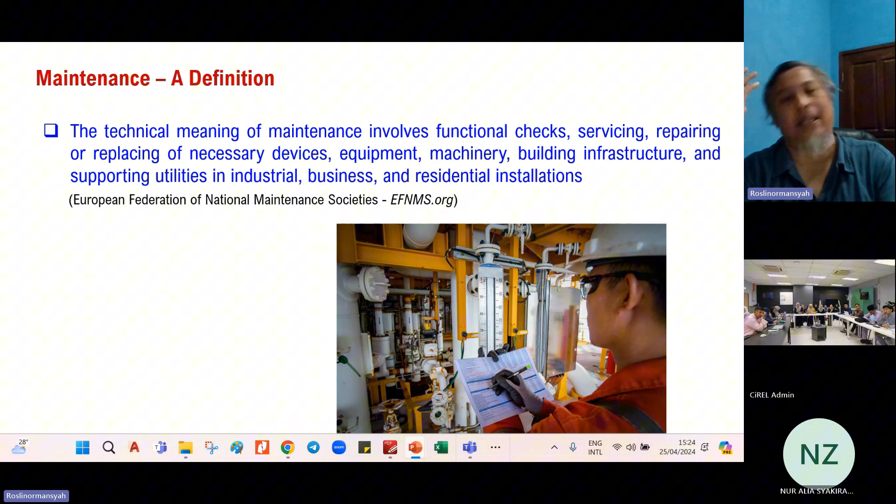And then the function - maintenance is also defined sometimes as repair or overhaul. So in maintenance, repair and overhaul, there are four kinds of objectives. One is about activity, which is very huge, very numerous. When you see the maintenance aspect, there is no limitation on time. Sometimes the time is limited, resources are limited, but the target is unlimited.

You have equipment, but the equipment is limited. You have time, but the time is limited. You have resources, but the resources are limited. And you have a target, but the target is unlimited. Sometimes we are dealing with this situation.

The boss wants the equipment ready - maybe 80%, maybe 90%, or maybe 100%. But on the other hand, there are limited resources for that. So how can the team do this safely? This is a big question. The boss wants the equipment to start immediately.

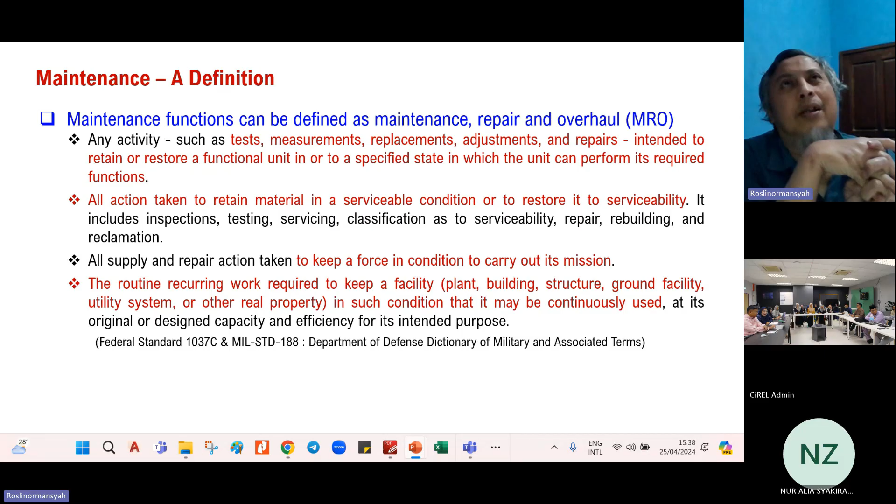Another thing is routine recurring work. This can create a stubborn person, because they feel, yes, I've been doing this for a very long time, more than 10 years, 15 years, 20 years, conducting routine recurring work like this. So for me, it is not new again.

If the person conducting maintenance thinks like that, then you have a hazardous situation, because 20 years ago is different from right now. Why? Because the risk is so dynamic. Risk is not static, risk is dynamic. It can occur from the equipment, from external factors like weather, natural situations, or it can be created by humans themselves.

When someone thinks, I'm a very experienced person for this, that means this person is in a dangerous situation, because they will disobey any small kind of risk, any small kind of deviation. As you know, a big accident or catastrophic accident mostly comes from small deviations. So be careful, be careful.

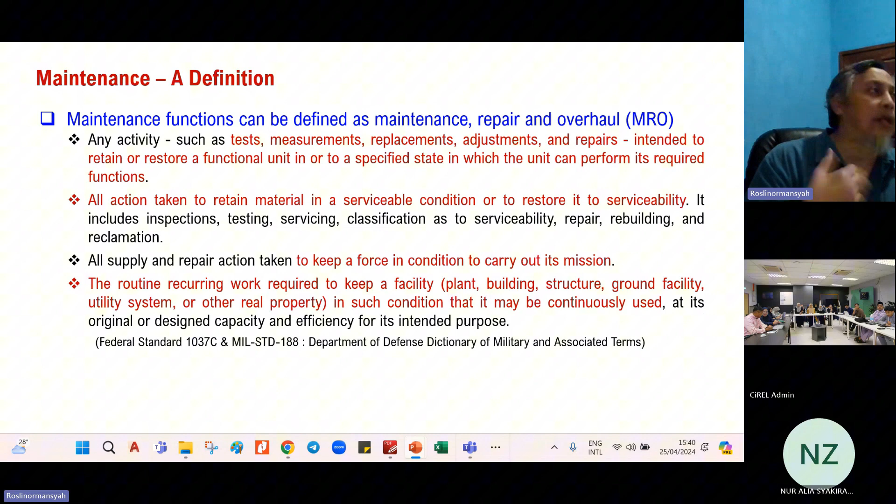Be careful with the person who feels that he or she is very experienced with this machine, with this equipment, because my experience has taught me a lesson that this kind of person will someday create a major accident.

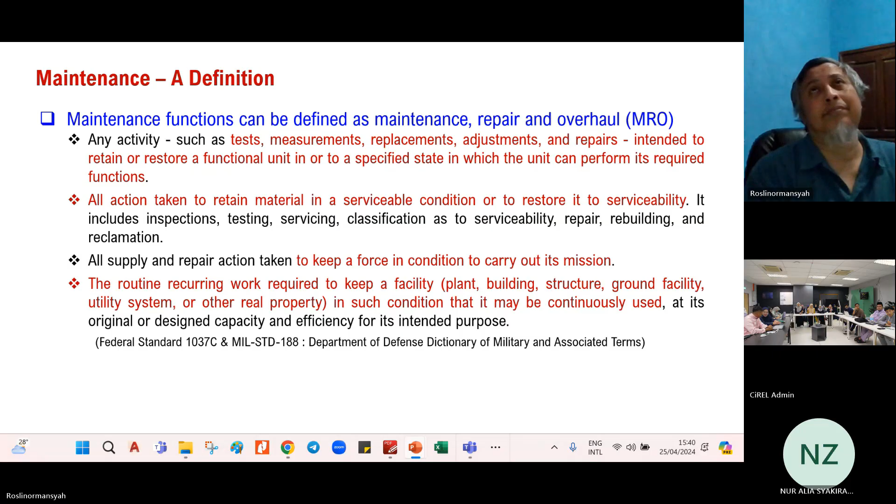As you know, maintenance is a very dynamic activity. It can be predictive, preventive, or reactive. Predictive and preventive are more stable compared with reactive, because in the predictive or preventive state we have good preparation. We learn from experience, we learn from history, and we prepare for maintenance, so safety can be more manageable. But in reactive maintenance, safety is not well managed.

Sometimes the problem is that most companies, most industries, choose reactive maintenance compared with preventive or predictive maintenance. So if you go to an industry that applies predictive or preventive maintenance, that means this industry is more concerned about safety, rather than an industry that is more comfortable with reactive maintenance.

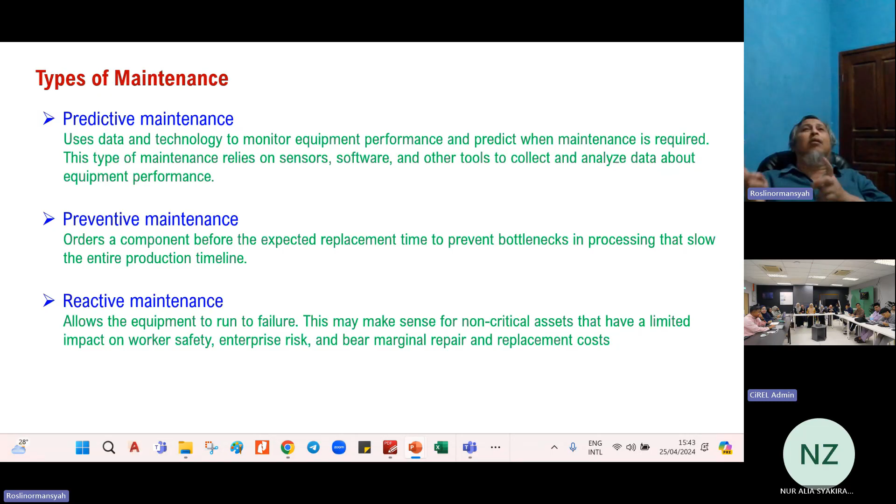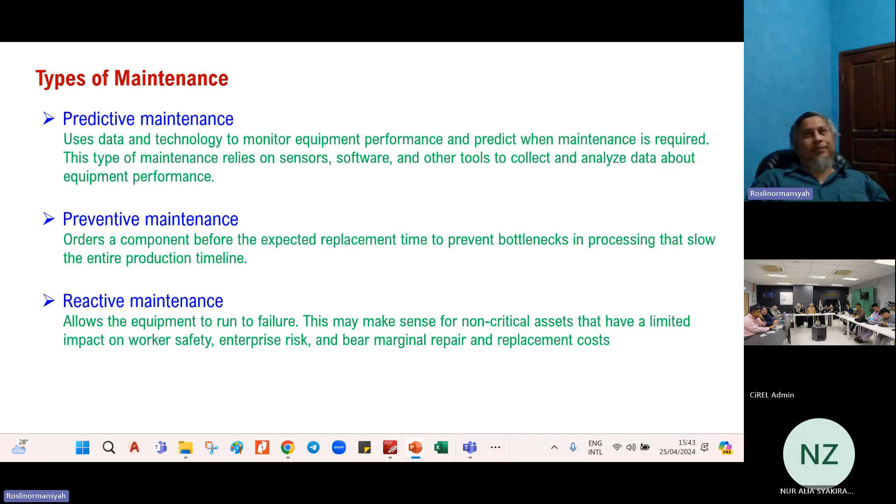From the schedule, from the plan, we know how they are conducting, how they are preparing, organizing, or monitoring. More planning, more execution, more monitoring means the risk is part of their concern. If there is no monitoring, no planning at all for the maintenance, that means there is no full concentration on making risk part of the heart of maintenance. It's very easy.

So the biggest challenge of maintenance safety comes from the habit, comes from the mindset, comes from the attitude, particularly if there is no participation of employees inside the maintenance activity.

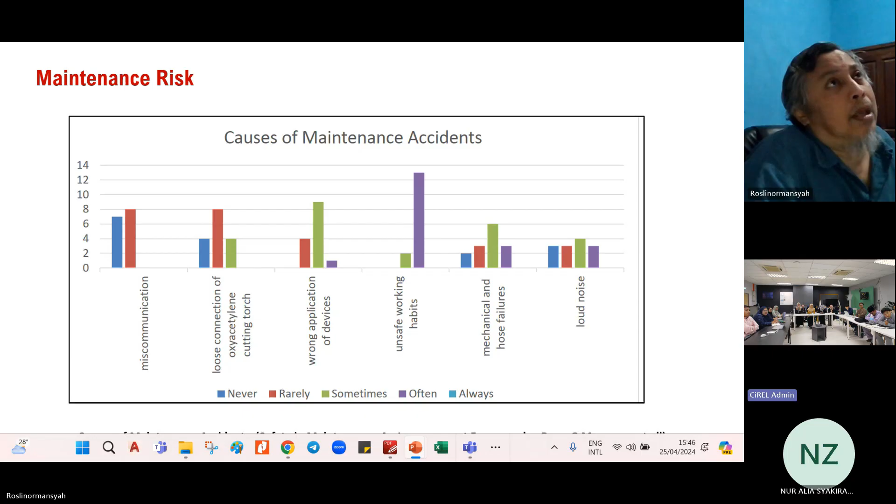Because they are requesting from the company, but the company is late to supply their specific tools. And the maintenance guy is chasing the schedule, chasing the timeline, so they have to conduct the maintenance activity right on time. But the problem is the equipment is not available.

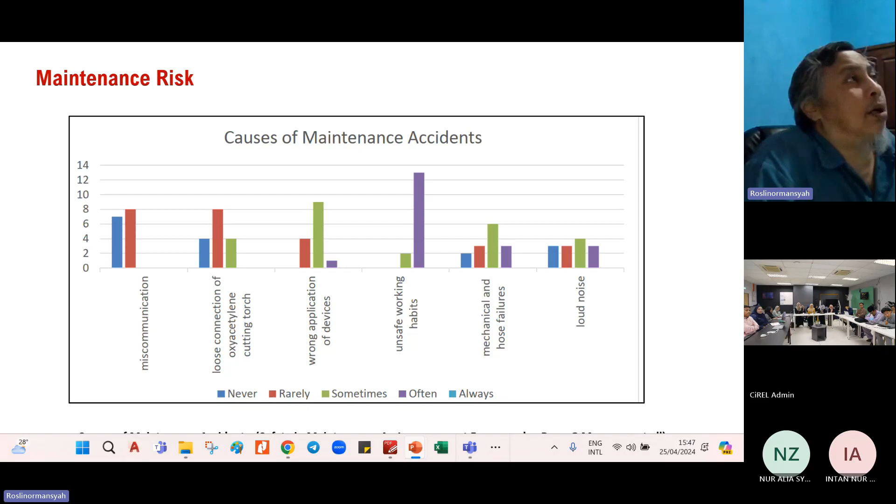So they are trying to use alternative equipment to finish the maintenance job with a specific tool they are creating, without any complete evaluation of the risk. Sometimes they are trying to modify standard tools for a specific purpose, and they use this modification without consideration of the risk, without consideration of the hazardous aspect.

They conduct the equipment, they conduct the maintenance job, and at the end of the day they get an incident or accident. So this is the most common incident which occurs in the maintenance activity.

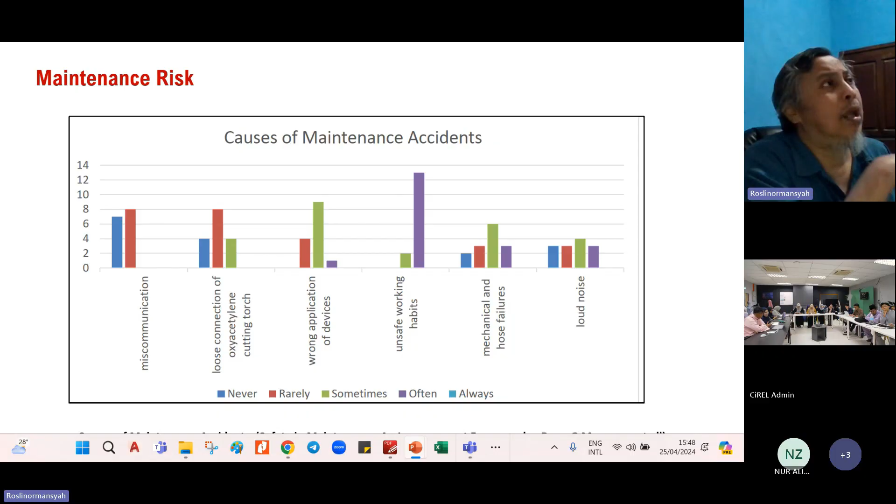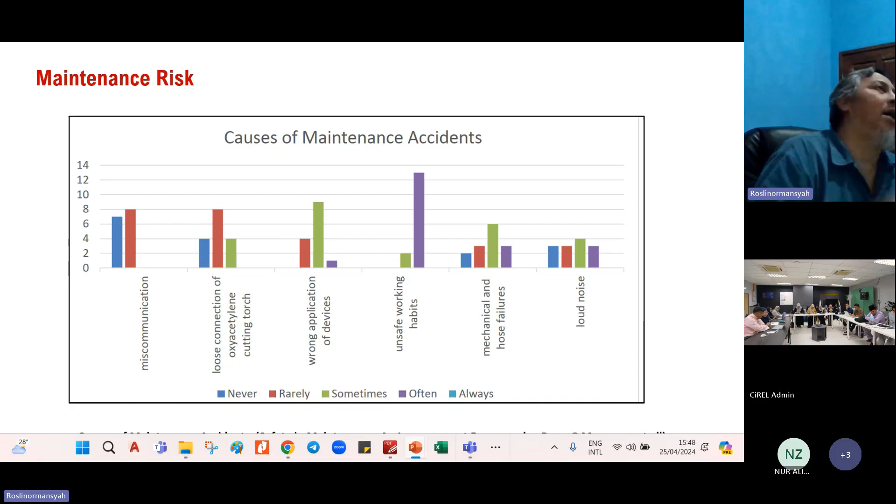They are creating something like a flow chart, showing how to conduct the best maintenance activity. They are trying to explain step by step how to conduct maintenance safely.

But at the end of the day, the company's reality is not as they imagined, because what is imagined in the procedure sometimes is not done. What the company imagines in the standard operating procedure, or SOP, is not done in reality. That is the biggest problem of the maintenance activity.

A lot of challenges. The company says you conduct steps 1, 2, 3, 4, 5, 6, 7. To repair, let's say, a genset, you have step number 1, step number 2, step number 3, step number 4, until the final step. But at the end of the day, these steps are useless.

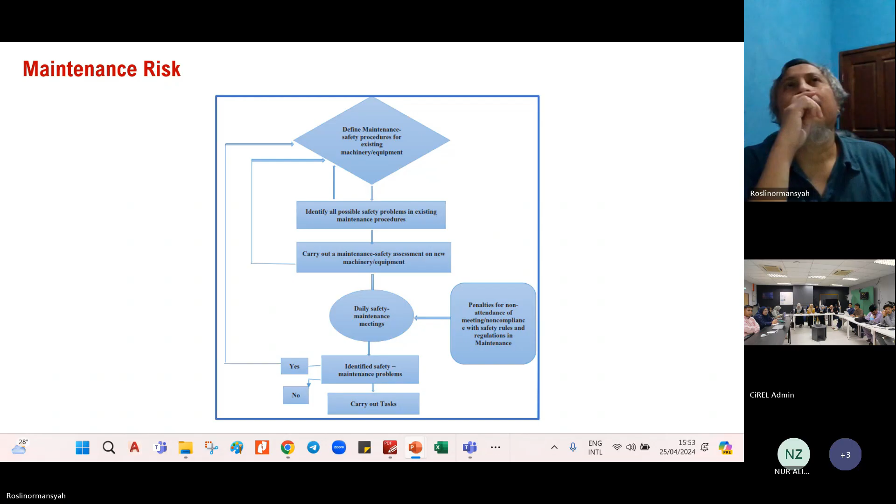This is common, not only in Indonesia but also around the world. It's only part of the procedure - you created the JSA, but it's not part of creating the right attitude in everyone who conducts the maintenance activity.

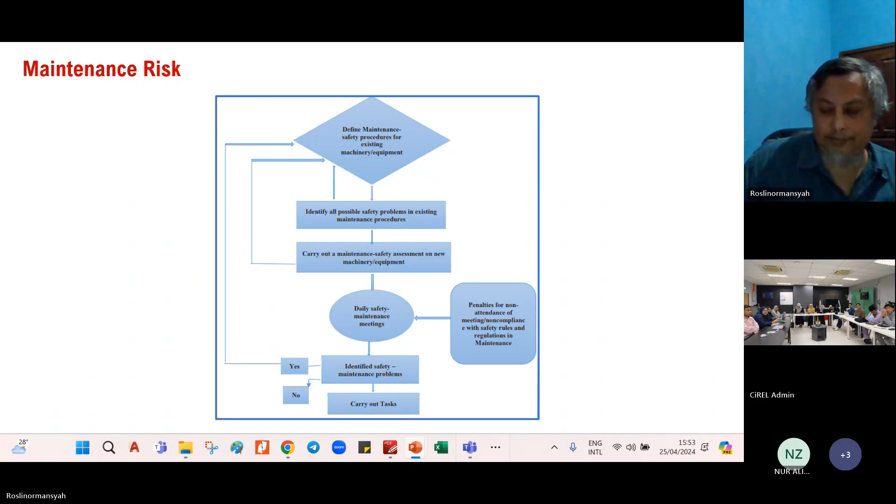The important thing is the principle of maintenance. One is stick to schedule. Because in maintenance, we have unscheduled maintenance - how we conduct unscheduled maintenance is also a big problem. But even though there is unscheduled preventive maintenance, you need a clear procedure for that. That's the first principle. Second,

authorization key, like lock out, tag out - what we call authorization in charge key. This is important. Sometimes someone can change the mode of operation from auto to manual. If they create a different situation without proper risk assessment or proper evaluation, this will create a hazardous situation. So many incidents are created from the key not being used by authorized personnel, but used by someone without proper authorization to change the mode of operation. This is also part of the risk in maintenance activity.

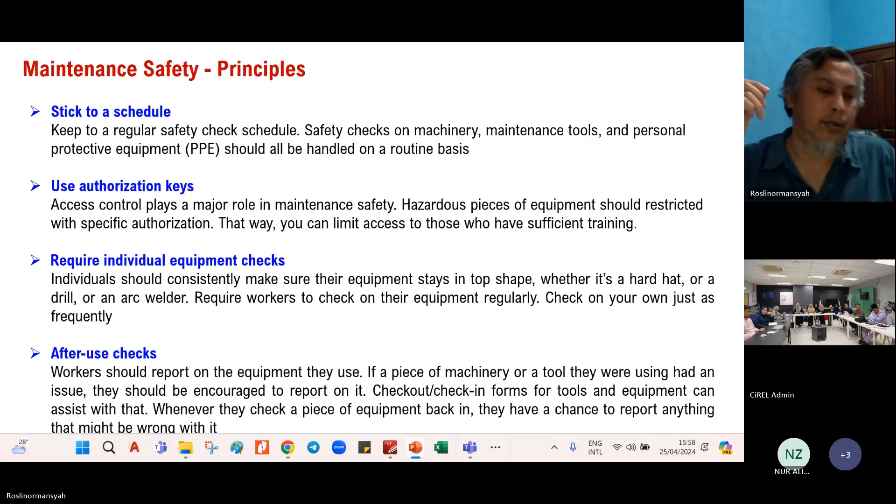To check, and then after use, you need double check. In process safety, we call it pre-startup safety review. Pre-startup safety review means before starting up, we need to ensure that what we are doing is already done safely - what we have done as a manual requirement, we have done as the procedure.

And then feedback - feedback is also important. You need the authorized person, the area authorization. When the maintenance guy does something in the production area, that means the production area has an authorization person. This person needs to be informed and needs to give feedback. Why? Because sometimes maintenance does modification or improvisation. If they do modification or improvisation without informing the production area or the production authorization person, they will create problems for production in the future.

So that's why in any maintenance activity, the production authorization area must be told by maintenance to ensure they are also aware of the risk after the maintenance itself.

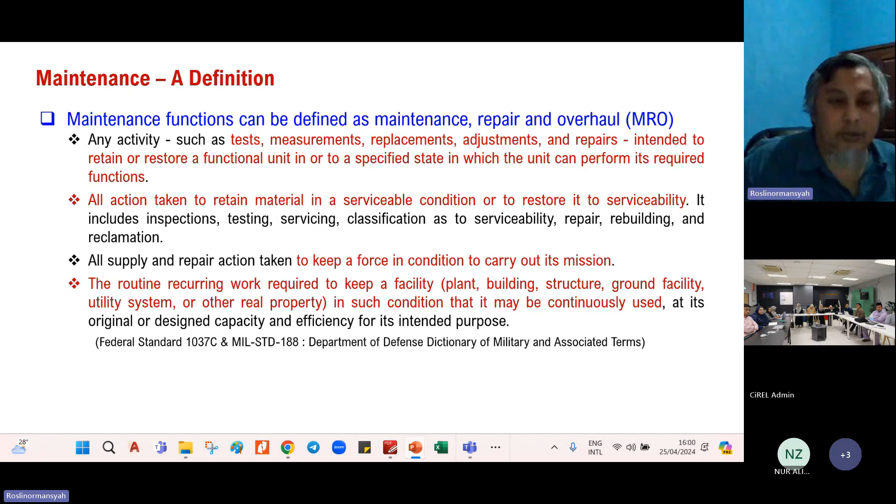So that's why we should ensure that they have proper training in the proper manner and at the proper time.

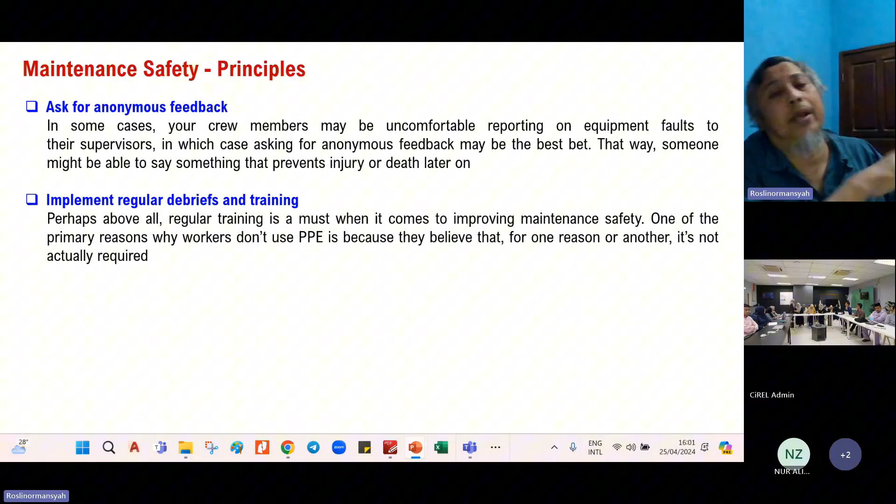And 5 basic rules for safe maintenance, as I said on the principle. One is planning. Predictive, preventive, reactive - all need planning. If we are talking about need planning, then we are talking about risk assessment. Without risk assessment, don't allow maintenance activity to be conducted.

It's simple. If someone wants to repair a pump, replace a pump, or check the compressor, ask them: you want to repair a pump, repair a compressor, do you know the risk? Yes, I know the risk. From where do you know the risk? Do you have a risk assessment? Yes. Where is your risk assessment?

And they show you the risk assessment, and then you ask, okay, how many times have you conducted this activity? Oh, so many times. Is it still the same as your risk assessment?

It is important. Even though we have limited time, we should give the time. Even though you have limited time, you still need to give time to discuss, to interview before they do the job, before they do an activity in maintenance. From the interview, you believe, you understand, you realize that they will be conducting maintenance in the proper manner, the proper way.

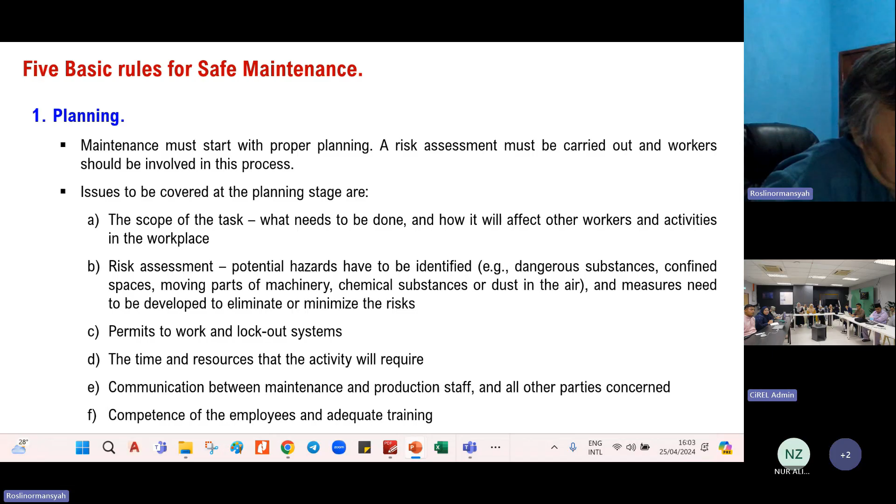Making workplace safe. Sometimes the number one place in industry with very high risk is the place where maintenance activity is conducted. No one can doubt that. Because the first place, the place where the guy conducting maintenance activity works, is the highest risk place. So it is important to manage the working place of maintenance, to make it a safe workplace.

Sometimes it is about habit. Maintenance guys will not return their equipment, their spare parts, their chemicals to the proper place. So we have an obligation to remind them, to make their attitude stick to workplace safety, to a safe workplace. It is important - we cannot remind them only once. We shall remind them every time.

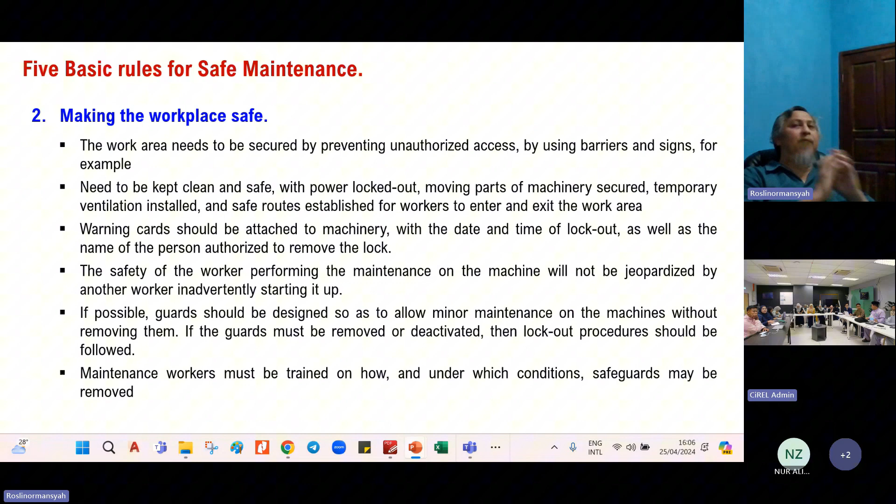Because it's part of what we call growth - growth of their attitude. If you want it to become a habit, you have to remind them every time, time to time. Don't get bored of this. That's why making the workplace safe is number one in creating or supporting the avoidance of unsafe behavior or unsafe activity.

Use appropriate equipment - it is also important. You know, our mechanical guys, our maintenance guys, are very clever. Sometimes they create special tools. Based on experience, they create special tools and work with these special tools, without proper risk analysis.

You can observe in many industries, if they are facing a situation without special tools available, they will use imagination, they will use creativity, to make special tools by themselves. If you find that a maintenance guy is using special tools not from the original manufacturer, but created by themselves, you have to stop it.

You have to intervene, you have to stop it. Because sometimes maintenance, to solve a problem in the equipment or device within limited time, they create a special tool, and this creates another risk. So we should enforce to everyone in maintenance activity to obey - not to use inappropriate or special equipment made by themselves.

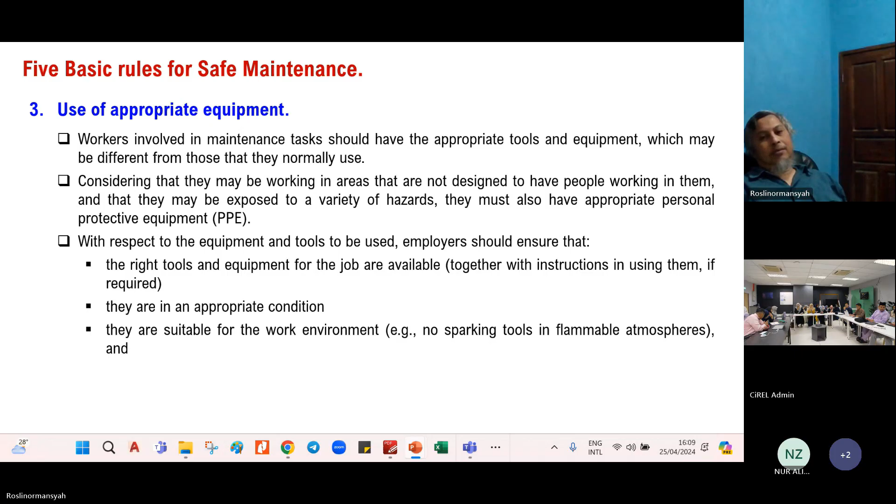Working as planned. It is important. Why is working as planned important? When we go back to the year '88, what happened in '88 in the North Atlantic Sea? Does anyone know what happened? Any huge catastrophic accident in the North Sea? Anyone know?

An accident occurred in 1988 in the North Sea. Anyone know? Not sure, we don't know. Oh, how come?

Are you familiar with Piper Alpha? The Piper Alpha accident, have you heard about that? Even you, have you heard about this accident in the North Sea in 1988? The platform Piper Alpha. Have you heard? Yes, yes.

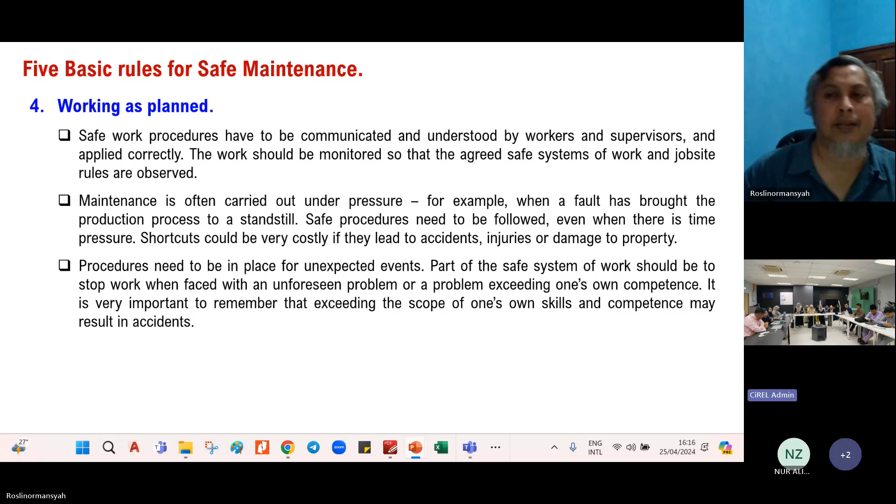That's why in safe maintenance, working as planned is very prioritized. Not only planning when we conduct this assessment, but working as planned means we conduct communication to everyone who becomes influenced by the maintenance activity. That means working as planned is different from planning. Planning means we are preparing a risk assessment, but working as planned means we need to communicate, we need to be understood. That's the important thing.

And then the final check, same as with Piper Alpha. In Piper Alpha, the maintenance activity was completed, but no final check was conducted, and no communication was conducted. Because the final check and communication were not conducted, this created the disaster for Piper Alpha. That's why the final check is very important.

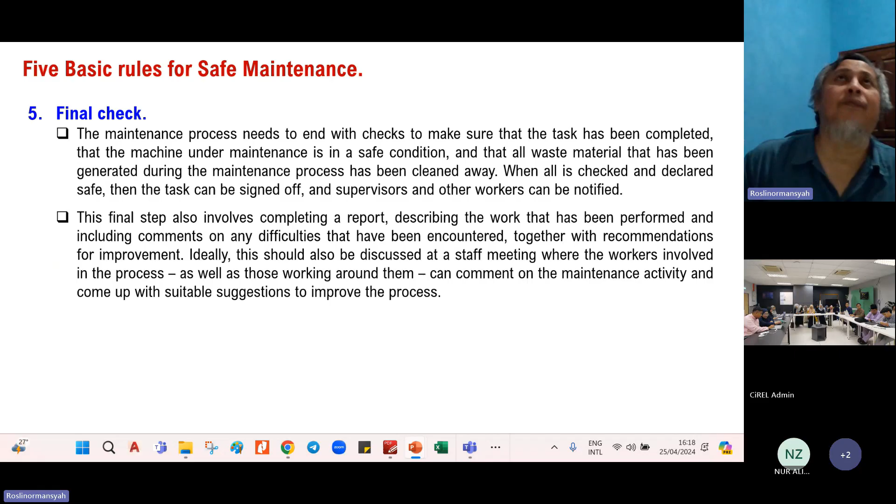So all 5 rules are important things. From the first activity until the fifth activity, all are prioritized. If you conduct without, or you avoid or neglect one of the 5 rules, you will create an unsafe condition. We can learn from the Piper Alpha disaster. Okay, any questions?